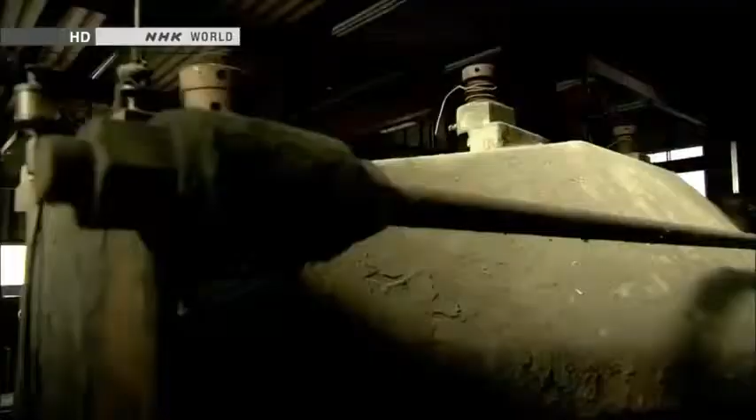In a workshop near Mount Fuji, a curious being has appeared. It's 3.8 meters tall and weighs 4 tons. It is a giant humanoid robot named Kuratas.

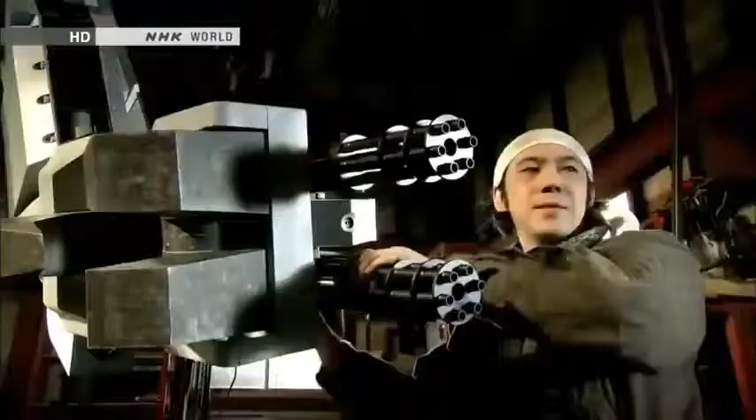Kuratas is a contemporary artist's creation. He holed up here for 2 years, building the robot with input from an expert. He calls Kuratas a work of art, but it's a sophisticated piece of machinery. A person seated inside can control the robot, move its limbs, and grab things.

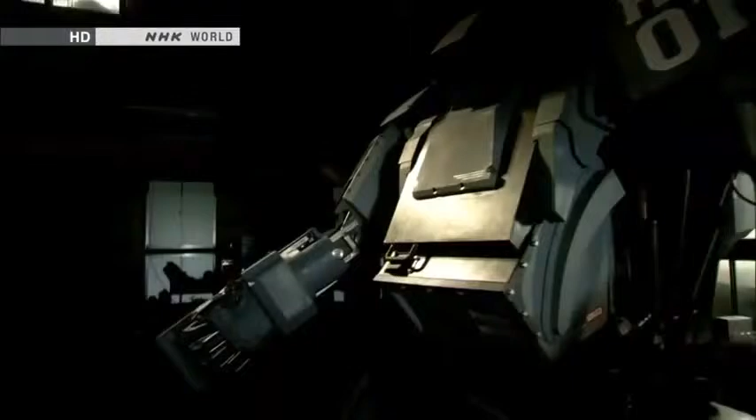The artist says he was inspired by robots in science fiction tales and animation. That vision sustained him as he worked in solitude.

Things that were once unthinkable are becoming real. How will robots evolve? Well, military applications could be one option. They'll probably become more and more like humans. They could surpass us in strength and ability.

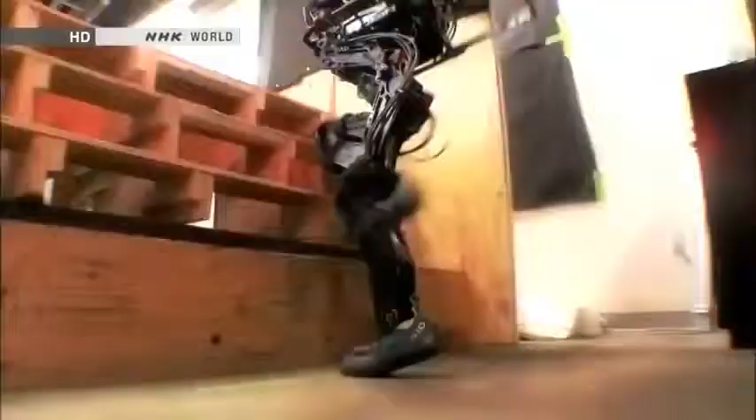People long dreamed of creating these extreme machines. Now, humanoid robots are here. They think like we do, move like we do, and even sacrifice themselves for us.

We want our robot to change society, because robots must be useful. Electronics and computing, progress in vision systems, there's many pieces of it. We will see much more capability continue to grow.

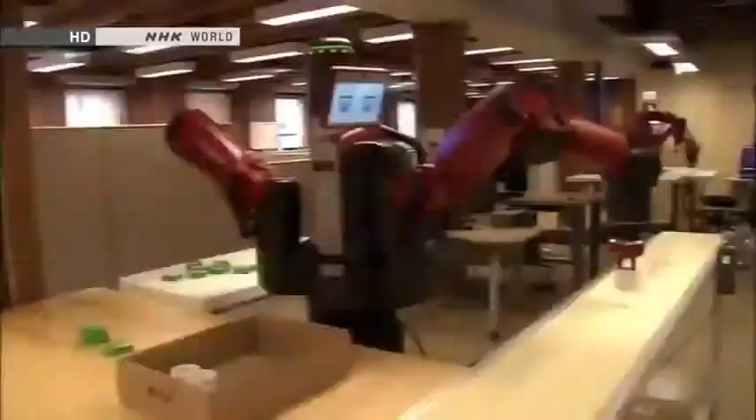Since the Industrial Revolution, people have entrusted some jobs to machines. But there may come a day when humanoid robots do much more complex jobs. Then, what will people do?

You'll see more and more robots doing things in society, whether it's manufacturing or service applications or home healthcare applications. The key will be to skillfully divide labor between humans and humanoid robots.

The disaster that hit Japan in March 2011 accelerated efforts to develop robots with human traits. The Fukushima nuclear accident left people powerless.

Robots can take over when things become dangerous. They can plow through rubble, climb ladders, even make repairs. People are turning to humanoid robots to handle all of these tasks.

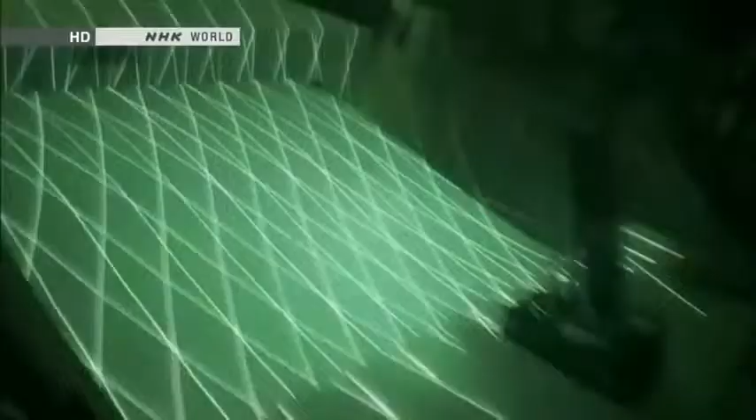We're eager to launch it soon to end the crisis. By joining forces, we can make a truly useful contribution. Only a humanoid could do it.

The day will come when robots will really assist mankind. The nuclear disaster in Japan sparked explosive advances in humanoids at the front line of robotics development. This program explores the future that's fast approaching.

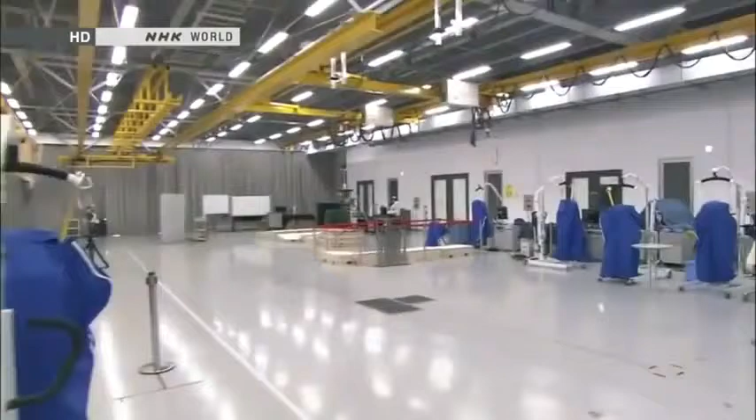Japan is a worldwide leader in the development of humanoid robots. ASIMO is the country's crowning achievement. Engineers continue to make improvements.

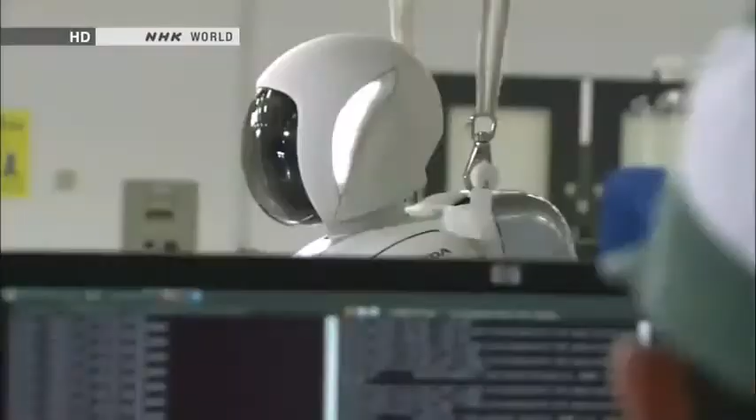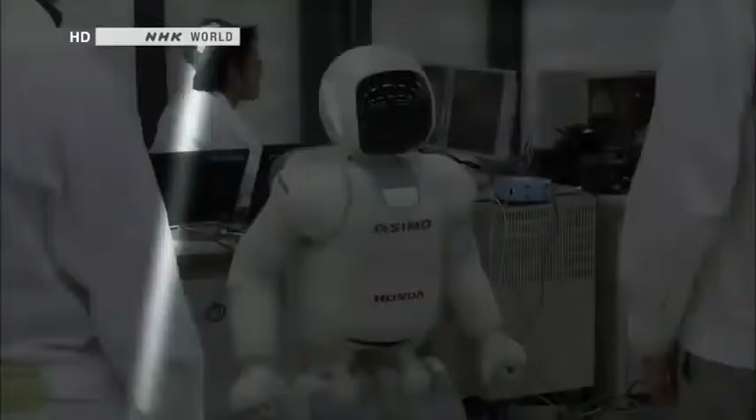ASIMO's most innovative feature is its advanced intelligence. The robot can think and act on its own without human intervention. That's made possible by sensors that replicate our 5 senses.

ASIMO's head contains 8 microphones. It uses them to listen and engage in conversation.

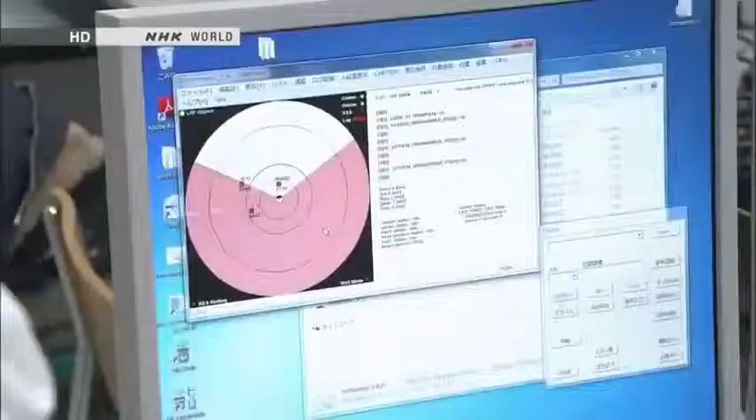ASIMO's artificial intelligence analyzes a vast array of information. That's how it understands people's requests and takes appropriate actions.

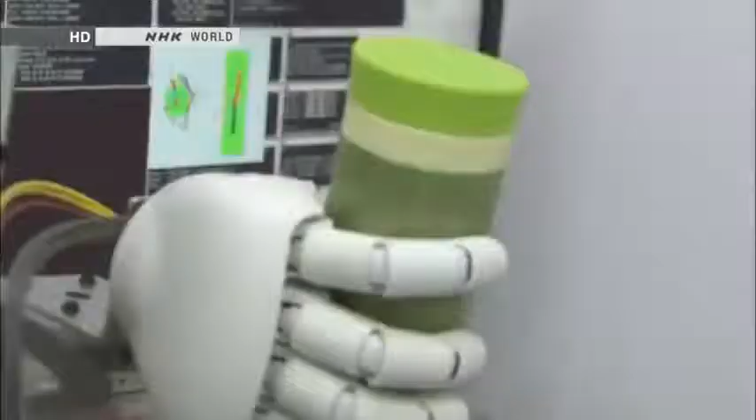ASIMO also has a sophisticated sense of touch. Its fingers can make subtle movements, like a person's. Sensors are embedded in the fingertips, too. They can gauge the hardness of an object, like human fingers do.

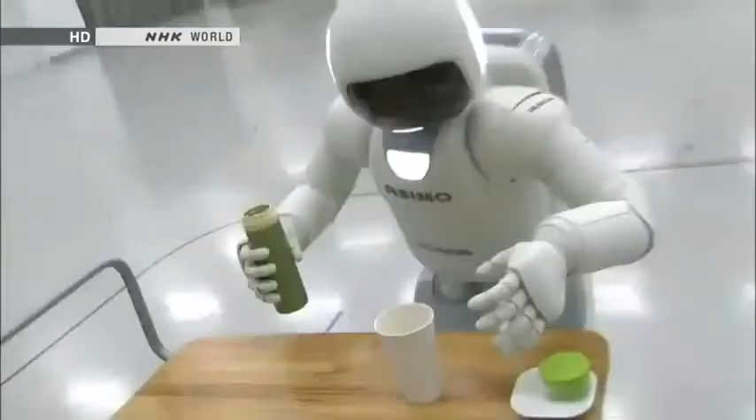Most robots use a fixed amount of strength to grab things. But ASIMO exerts more power to open a tightly sealed water bottle and less when holding a paper cup. Its artificial intelligence uses information from the fingertip sensors to adjust the grip.

The developer's ultimate goal is for ASIMO to be a valuable partner that coexists with humans. The engineers who created ASIMO all grew up watching animated shows about robots, such as Astro Boy, Doraemon, and Gundam. They dreamed of someday making their own.

Satoshi Shigemi is the development team's leader. He has been designing robots for the past 16 years.

From the beginning, we wanted to design a robot that could help people. To realize that dream, we're constantly asking ourselves, what kind of robot would be able to change society, make people happy, and make life easier for people around the world?

Our idea is to create a robot that will change how people live. We're working through the technological issues, one by one, in order to reach that goal.

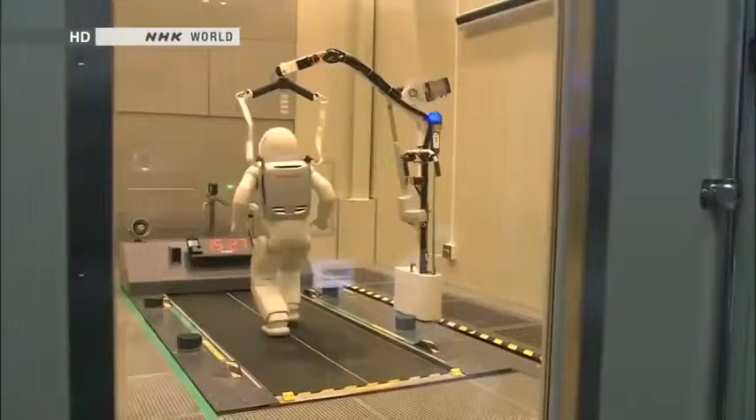ASIMO's advanced physical capabilities are revolutionary. The robot can walk and run. It can reach speeds of up to 9 kilometers an hour.

For robots, walking is much easier than running. When running, both feet momentarily leave the ground. Balancing in mid-air is no easy task.

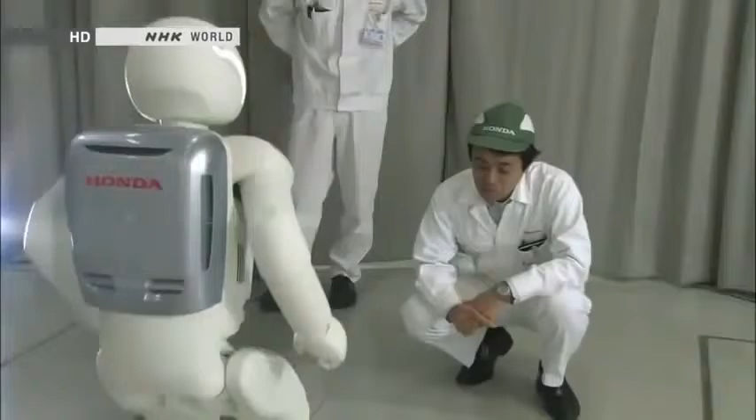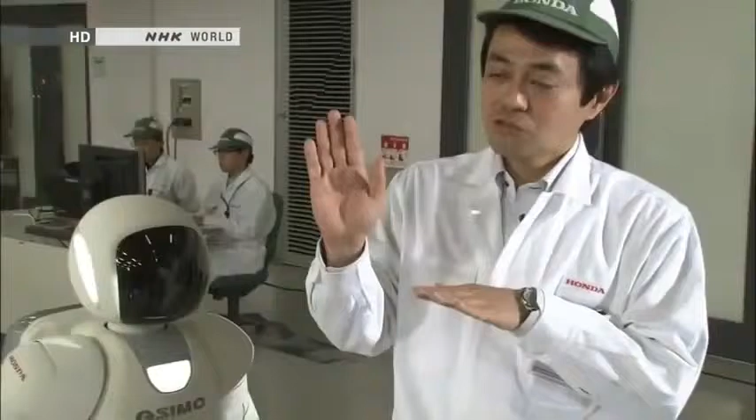Maintaining posture while jumping or floating in the air was a major technological breakthrough. ASIMO leans its upper body slightly forward to maintain overall balance. It goes forward straight in the air.

Sensors in ASIMO's waist measure the robot's angle. It leans slightly to compensate, forward or back, side to side. That's how it stays perfectly balanced in the air.

ASIMO has been evolving ever since development began in 1986, much like a growing child.

But something happened that made researchers realize ASIMO's real-world limitations. It was the accident at Tokyo Electric Power Company's Fukushima Daiichi nuclear plant. The damaged reactors released radioactive substances, making it difficult for humans to deal with the crisis. People needed something that could confront the dangers and bring the plant under control.

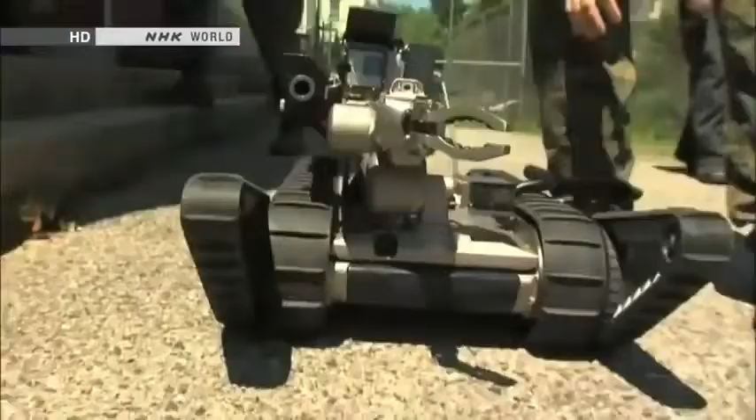Robots. Japanese officials sent a request for robots developed by the U.S. military. The robots were sent to Fukushima in April 2011. They recorded images inside the damaged reactors.

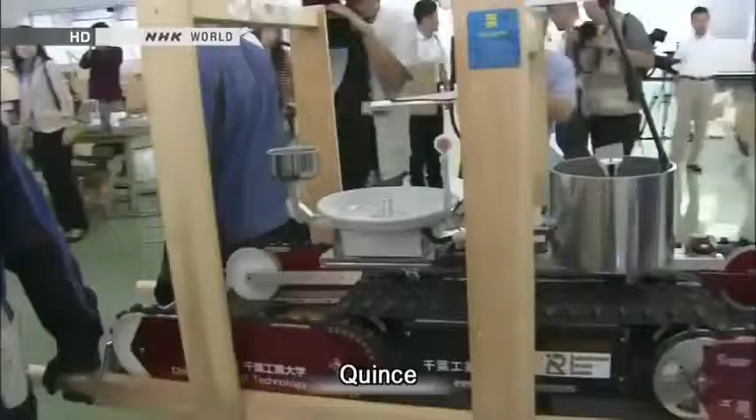Since then, a variety of Japanese robots have been enlisted as well. Robots have proven to be useful, but 2 years after the accident, they're only used for inspections. They're not able to do all the work of humans.

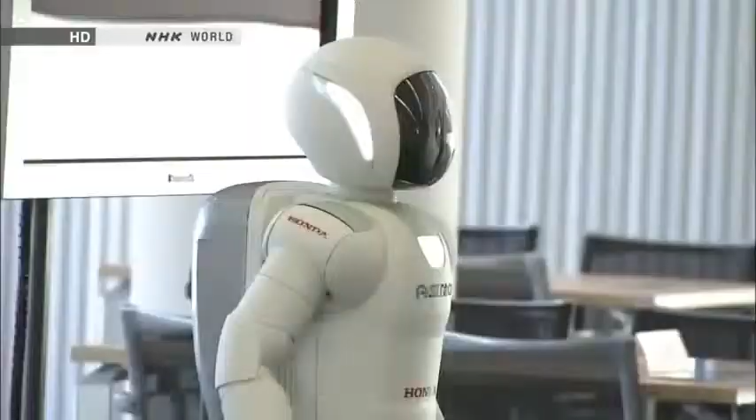What about ASIMO? Right after the disaster, people flooded Honda with phone calls and emails asking the company to send ASIMO to the Fukushima plant. But ASIMO wasn't up to the task. It could move nimbly over an office floor and other flat surfaces, but large vertical gaps and obstacles were a different story.

We heard from many customers. We ourselves regretted that ASIMO couldn't be of help. It was obvious that the ASIMO we had built wasn't ready for real-life action. We realized right away that we needed to make something different, something new that could offer immediate assistance.

Honda wasted no time. Company officials offered to create a robot free of charge to assist TEPCO in the recovery. TEPCO accepted. Officials asked for a robot that could open or close valves inside the nuclear plant.

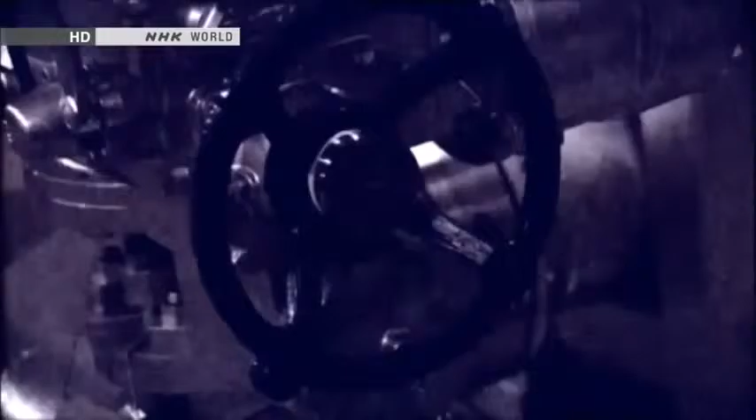We wanted to flush out radioactive materials that remained inside the pipes and bring down radiation levels in the facility. That was our first goal. Unless we opened or closed the valves, the area would remain highly radioactive, and that would prevent workers from entering the facility and impact the entire decommissioning schedule.

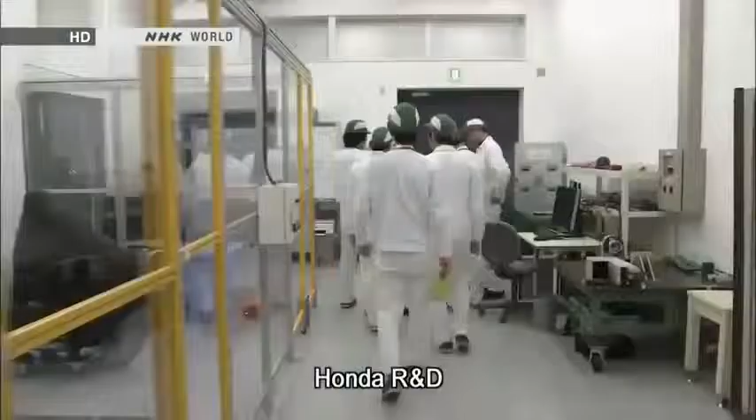How many valves are there? Each unit has from several thousand to tens of thousands of them. In July 2011, 4 months after the accident, Honda began designing a robot for use at the nuclear plant.

Members of the ASIMO team were put in charge of the project. A humanoid robot would take too long to build, so engineers focused on making a robot specifically for operating valves. ASIMO was crucial to their efforts. Its ankles employ advanced balancing technology. Developers reasoned that using it would allow the new robot to work inside rubble-filled reactor buildings.

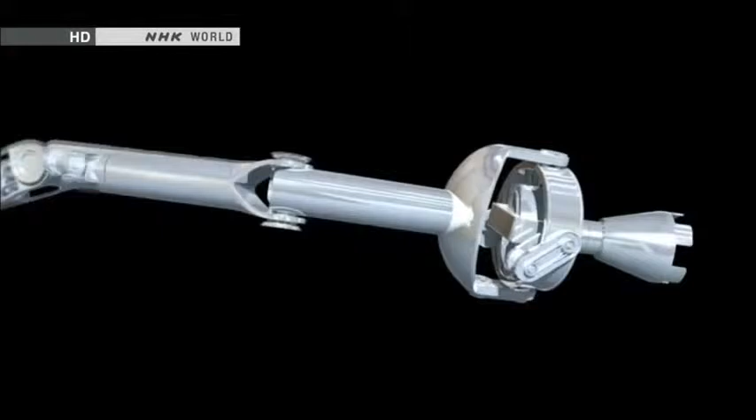The team worked exceptionally fast, completing a prototype in just 4 months. They turned ASIMO's leg into an arm for operating the valves. Even when the base moves, the arm remains steady.

So far, so good. Officials from TEPCO evaluated the prototype at the National Institute of Advanced Industrial Science and Technology. The government-backed group for cutting-edge research contributed to the development effort.

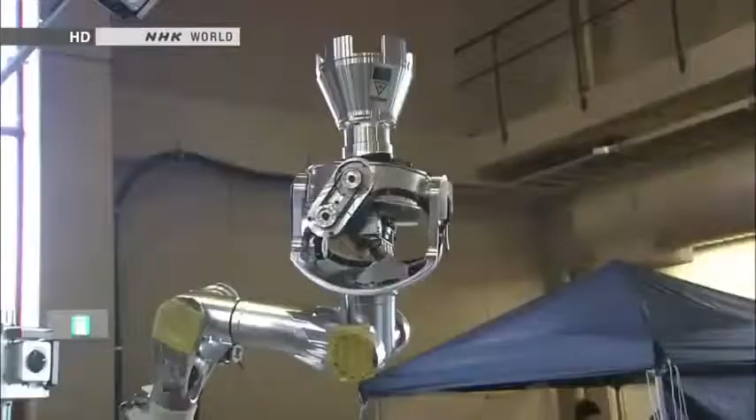A TEPCO official couldn't take his eyes off the robot's movements. We may be quite demanding. That's okay. We might be quite direct. The test is designed to replicate conditions inside the nuclear plant.

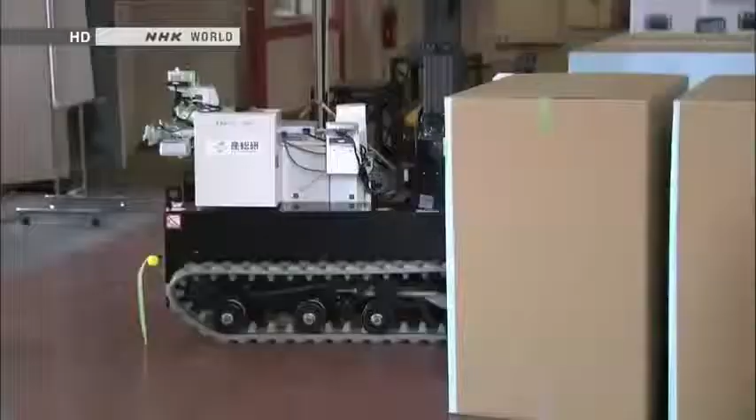The robotic arm is remote controlled. Testers send the arm toward one of the valves. There are a number of unknowns, including the condition of the valves. They may have rusted since the accident. A valve might break if the robot applies too much force, or it might not budge at all.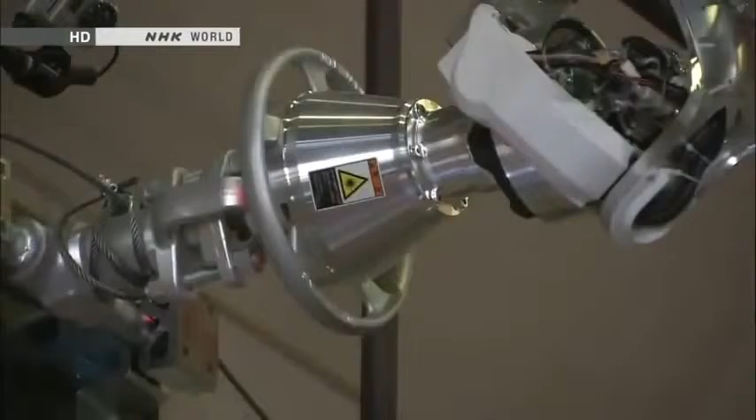The robot uses just the right amount of force and turns the valve on the first try. It's passed the test. This robot can do more than inspections. It could help in the recovery effort.

From what we've seen, the robot seems near perfect. We want to use it as soon as the need arises. It's important that we quickly do what we can to make that possible.

The Fukushima accident also encouraged U.S. developers to design emergency response robots. Department of Defense officials have spearheaded the effort. Before, they had shown little interest in humanoid robots. Now, they view them as vital for disaster response. The architect of the new strategy is Gill Pratt of DARPA. He oversees funding for leading-edge research at the Department of Defense.

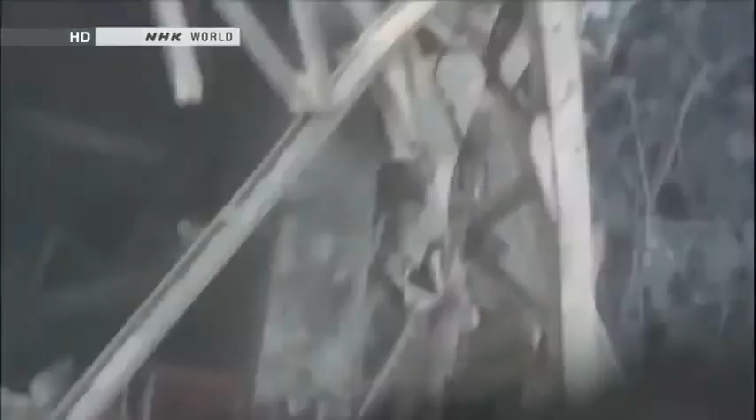There are many aspects of disaster response in Fukushima that inspire people in robotics to work on new capabilities. If they were able to take action during those first 24 hours, the first reactor might not have blown up in an environment too dangerous for a person to do. What's important to us is that the robot is compatible with human environments, human tools, and human operators without special training. As a result, the easiest form that comes to mind is the human form.

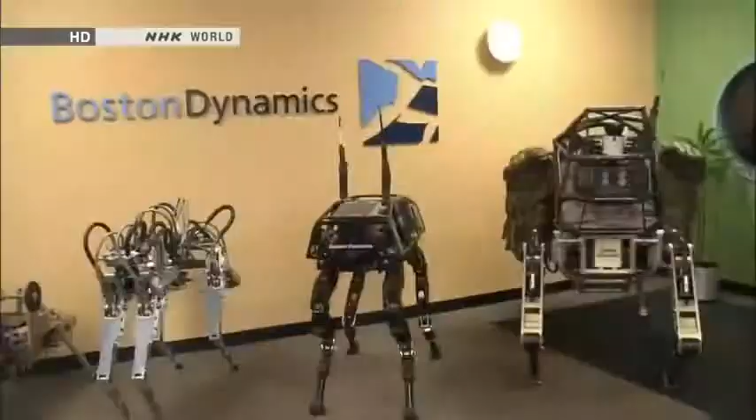DARPA is backing the development of a humanoid robot for catastrophes, such as nuclear power plant accidents. This company is leading the development work and has already built several military robots. Okay, I'll show you the current status of the robot.

This is the first American-made humanoid robot for disaster response. It's called Atlas. Before, U.S. designers had focused on robots with specialized functions.

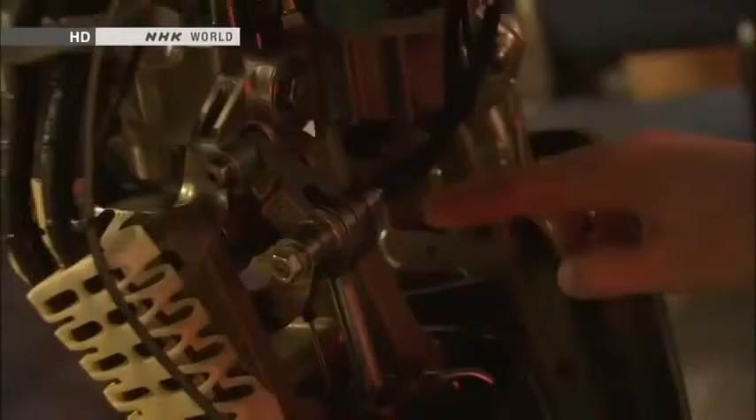Why the sudden interest in humanoid robots? Traveling over debris, prying open valves, using tools for repairs - performing multiple tasks like these is impossible for specialized robots. Crises also require robots that can navigate doors and stairs. Humanoid robots are ideally suited for such situations.

Tests of this prototype were going smoothly. It can easily climb stairs and jump from a height of nearly a meter. It can negotiate obstacles using its arms and legs. It can already handle more demanding environments than Asimo can.

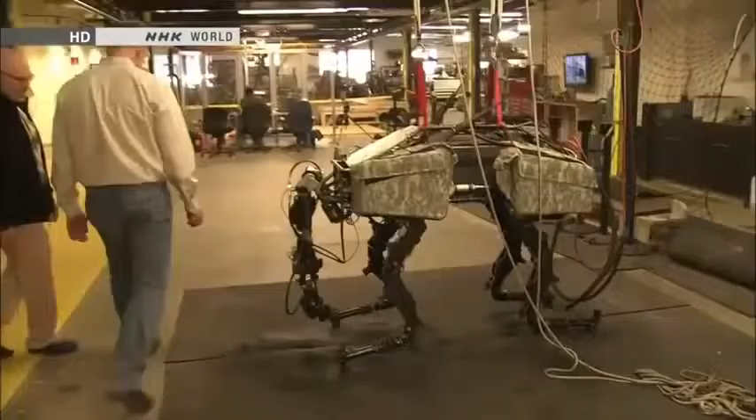Atlas is loaded with technologies originally designed for military robots. A quadruped robot called Cheetah can race through a battlefield at 50 kilometers an hour. LS-3 is for transport - it can carry heavy supplies for soldiers.

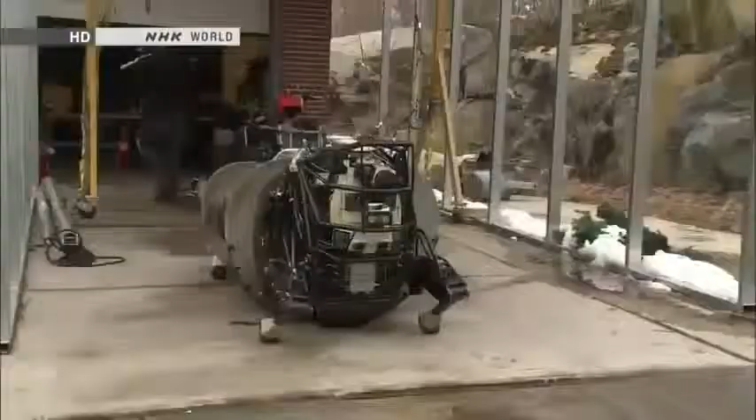The ferocious-looking robot gets its strength from a powerful hydraulic drive system. A hydraulic device can be small, yet quite strong. The black cables convey hydraulic power to the legs.

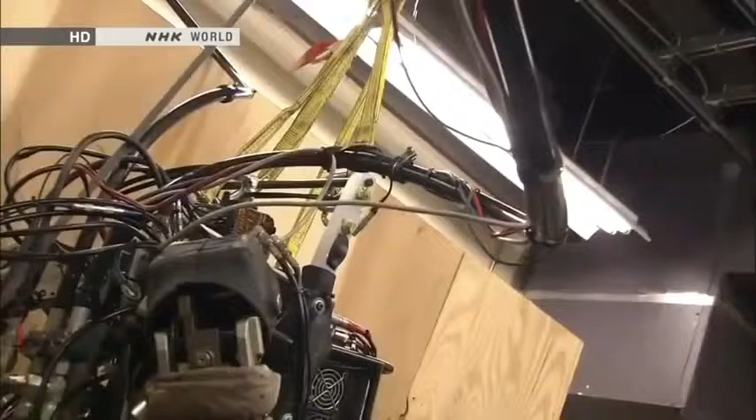That generates the brute force required for harsh conditions on the battlefield. A web of hydraulic cables covers Atlas's body, forming a muscular suit of armor for clearing debris.

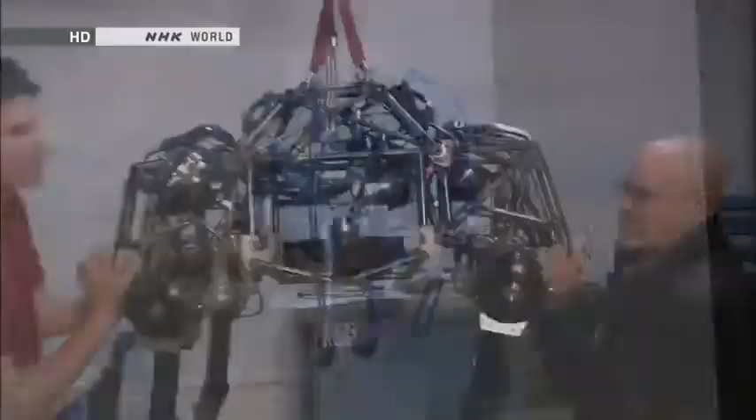Another important technology comes from military robot engineering. This machine's joints have a wide range of motion, allowing for flexibility that humans can't achieve. Atlas's joints are capable of moving in 28 different ways. Atlas can crawl through narrow spaces and withstand sudden shocks.

But then we have the knee - this has 3 in the hip, just like us. This way, and then this way. I am very impressed with the number of degrees of freedom.

It will be able to do these human-compatible tasks without a lot of the limitations that other robots have. Engineers will combine Atlas's rugged body with sophisticated artificial intelligence that's almost near completion. They aim to complete the robot by December of next year.

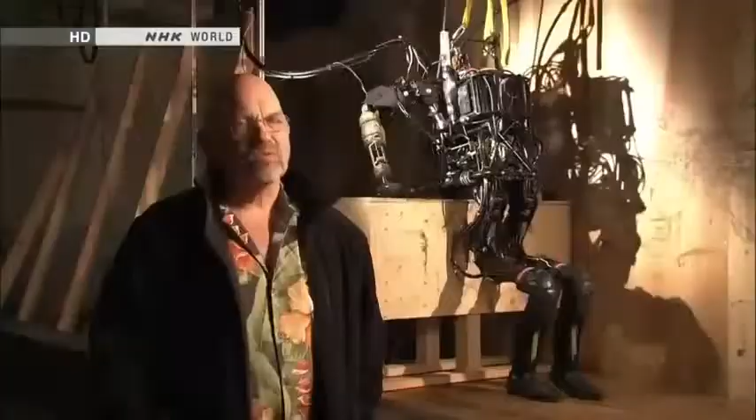One reason you see humanoid robots is because there's some people working who are really interested in robots as an entertainment thing or as a performance thing. I think that's different - we're much more interested in basic capabilities for emergency response, rescue. So I don't think Asimo has been designed to do those things yet.

U.S. engineers stepped up their efforts to develop humanoid robots after the nuclear accident in Japan. Japanese researchers are embracing the same mission. In November 2012, robot engineers from around the world gathered in Osaka for an international conference on humanoids.

Gill Pratt from DARPA was one of the participants. He came to invite engineers to join a project sponsored by the U.S. Defense Department. Okay, March 11th.

After 24 hours, if only a robot had been there to go and open that valve, the entire disaster could have been averted. But we didn't have one, and furthermore, we didn't have anyone that could do the job. So shortly afterwards, we actually started planning the DARPA Robotics Challenge.

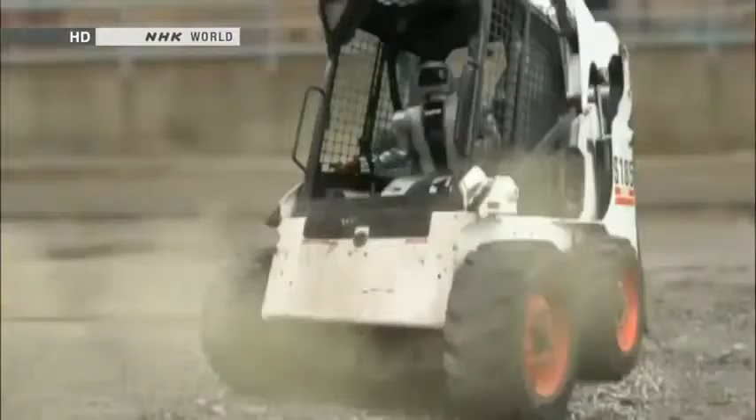The challenge consists of 8 tasks: driving a vehicle to approach a disaster site, walking over rubble, removing obstacles, opening doors, using tools to break down walls, climbing ladders, turning valves, and making repairs.

A single robot must complete all 8 tasks. The development period is 2 years. DARPA will provide contestants with funding of up to $4 million.

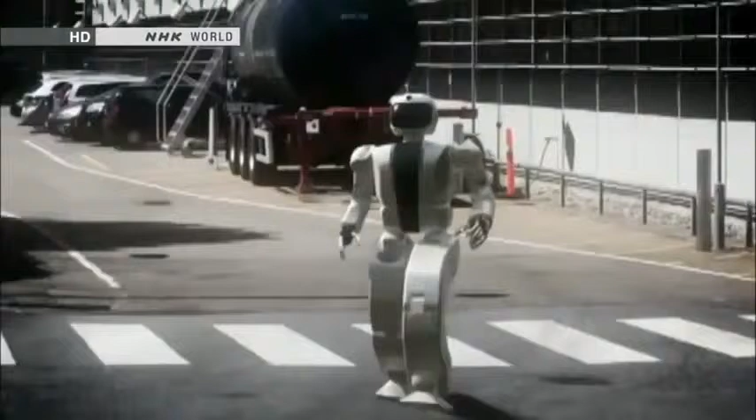DARPA has received over 100 proposals from research groups worldwide, including renowned organizations like NASA and MIT. Japan is at the forefront of humanoid robotics engineering, yet its researchers hesitated to throw their hats into the ring.

So actually, to me, it's difficult not to see that some of the results of DRC are going to be used to advance, as you say, advanced military technology. The DRC is about developing robots that I believe wholeheartedly are completely impractical for military purposes, for offensive military purposes.

Will the technology that we come up with find its way into military systems? Probably yes. But I guarantee you that if you work on a robot for healthcare, there's a chance that that technology will also find its way into military systems.

The members of one Japanese research institution wanted to take part in the competition.

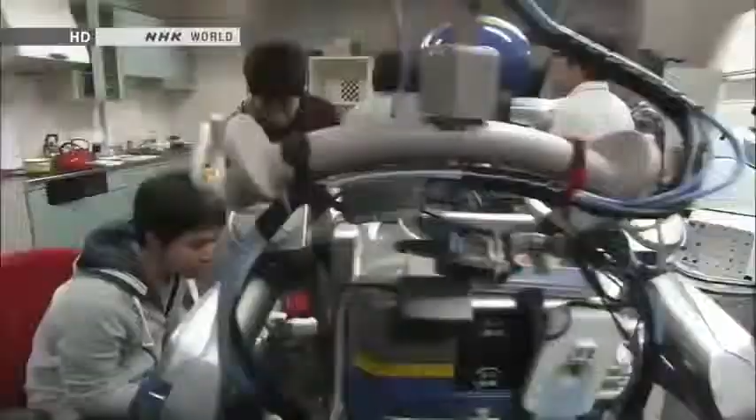They worked at the University of Tokyo's robotics lab. Researchers there, along with those at Honda, are global leaders in robotics engineering. But they faced a major obstacle to competing: the university bans military-funded research.

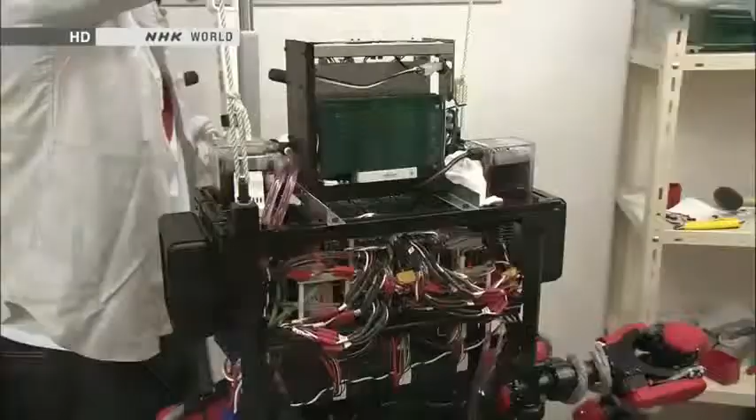Three researchers made a decision. They told the university they were leaving. Then they decided to set up a venture company and enter the DARPA Robotics Challenge. They couldn't shake the feeling that they should leave their quiet university lab and help resolve the nuclear crisis.

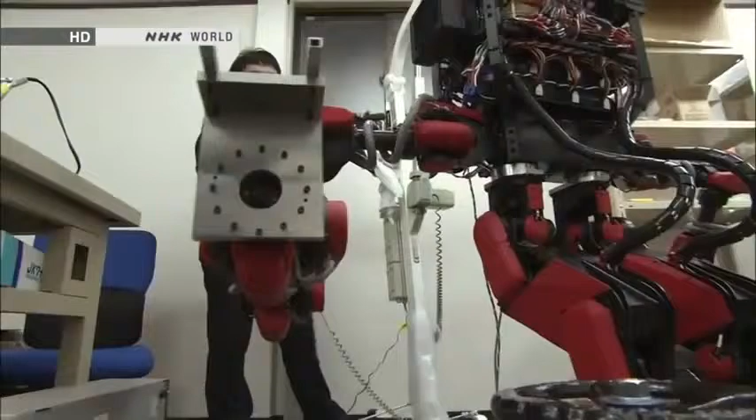Six months after launching their venture, the team had just completed a prototype with help from university graduates. Its long arms can exert 10 times more force than those of conventional humanoid robots.

It's too tight to turn with one hand. It can easily turn a valve that's too tight for a person to turn. The strong force comes from a large electric current that pushes the motors to their maximum limits.

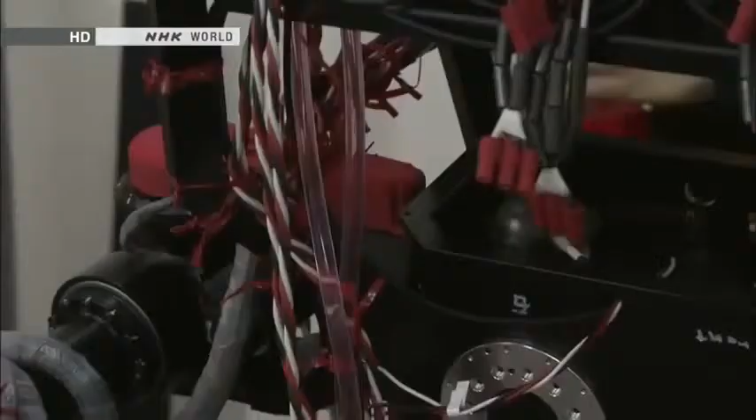A reddish fluid circulates through the robot's body. The fluid serves as a coolant that keeps the motors from overheating. The cooling system should enable the robot to perform hours of grueling work at disaster sites.

The time has now come for the developers to apply their years of research to the real world. A nuclear crisis has happened here in Japan. Radiation is escaping. Researchers in every field must wonder at least once if the technology they've been working on could help resolve the crisis. By joining forces, we can make a truly useful contribution. It's with this in mind that we decided to enter the competition.

One country is quickly catching up with Japan in humanoid robotics: South Korea. KAIST is a government-funded lab for the advancement of science and technology. Researchers there were among the first to express interest in DARPA's Robotics Challenge.

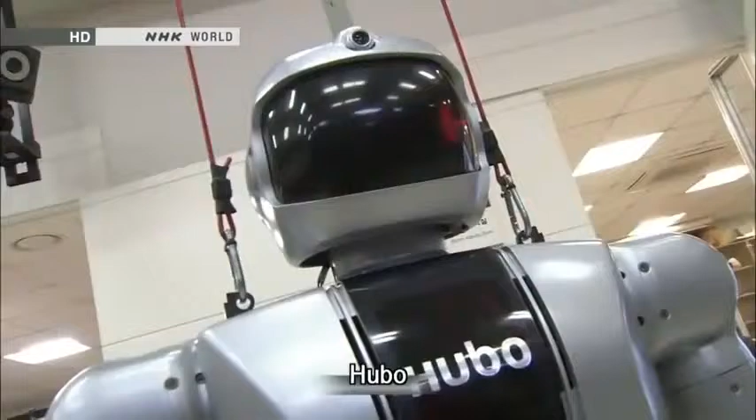This humanoid robot is called Hubo. It's modeled on Asimo, which Honda spent 14 years developing. Hubo was built in just 5 years. Hubo deftly manipulates its hands, and it's also good at dancing. Its moves look just like Asimo's.

Hubo has been undergoing a major upgrade ahead of the competition. It can now bend backward at the waist while walking to handle all kinds of environments. It can quickly pick up tools. The tests were going well.

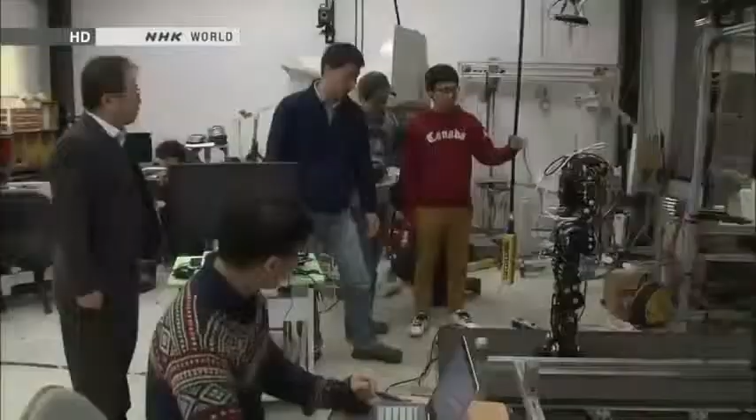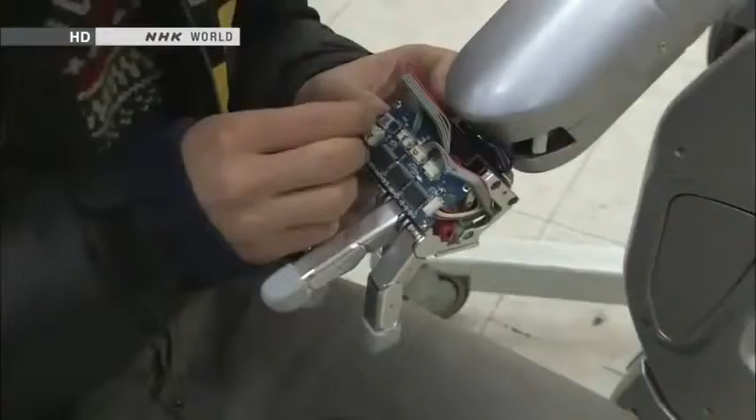People have always compared Hubo to Asimo. Engineers now had a strategy to get ahead of the Japanese developers. They decided to publish certain details about Hubo's design and pursue joint development with researchers at other institutions. One could say that this space inside Hubo's chest captures the heart of their thinking.

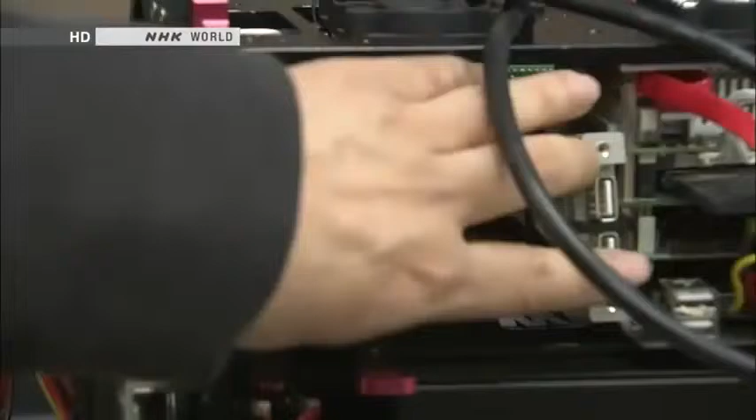It's empty now, but this is where artificial intelligence will be installed. It's removable. Hubo does not yet possess artificial intelligence. Its motions are as sophisticated as Asimo's, but Hubo's movements are all pre-programmed.

U.S. universities that lead research into artificial intelligence will develop a brain for Hubo. The stage has been set for a joint U.S.-South Korean team to compete in the DARPA Robotics Challenge.

Sharing is the key to making technological advancements. That's true in South Korea and in other places too. Research shouldn't be confined to one place. People developing humanoid robots elsewhere are too close-minded.

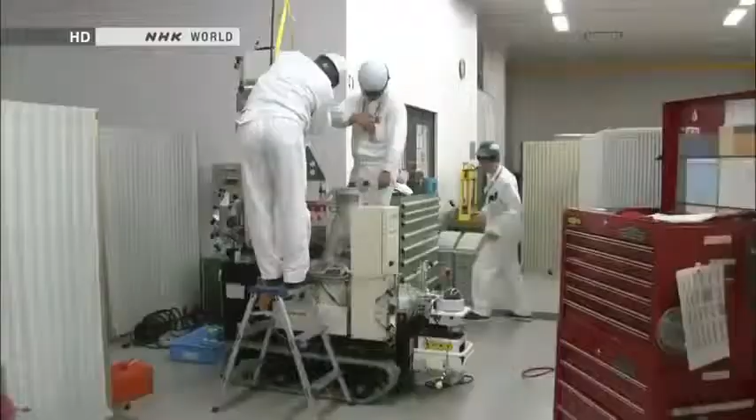Researchers at Honda were also invited to enter DARPA's competition, but they declined. Their energies were focused on designing a robot to tackle Japan's nuclear crisis.

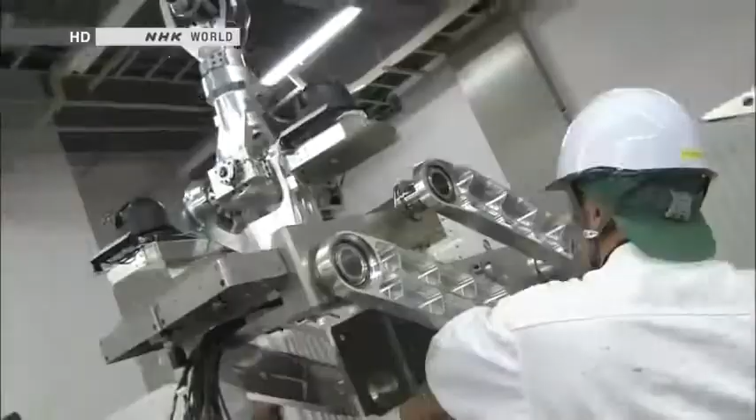Nearly a year has passed since Honda's robotic arm passed evaluation tests, but the device has yet to be deployed to the nuclear disaster site. That's because officials at TEPCO requested a change in specifications. Engineers have replaced the valve-turning hand at the end of the arm with a camera.

TEPCO had changed its plan. Officials decided to put priority on assessing conditions inside the plant's facilities. They said it was too early to have robots work on valves. There wasn't even a recovery plan in place when we were working out the valve manipulation tasks.

Confusion also prevailed at the site. We were expecting valve work to begin 2 to 3 years after the disaster, but the timing has ended up being later than what we'd assumed one month into the crisis.

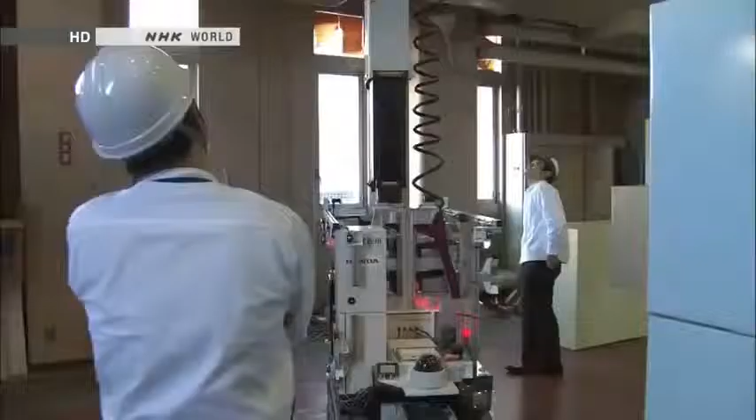The robotic arm will soon be sent to the accident site. It will provide the first images filmed from high up. The robotic arm was not the end of Honda's efforts. Its engineers had another secret mission.

They would develop a new humanoid robot, an updated version of Asimo for use in disasters. The site where the Fukushima disaster took place is dark and off-limits to humans. Only a humanoid robot with both intelligence and motor skills could climb over the debris, get to the accident site, and perform the work of people. In other words, a robot like Asimo.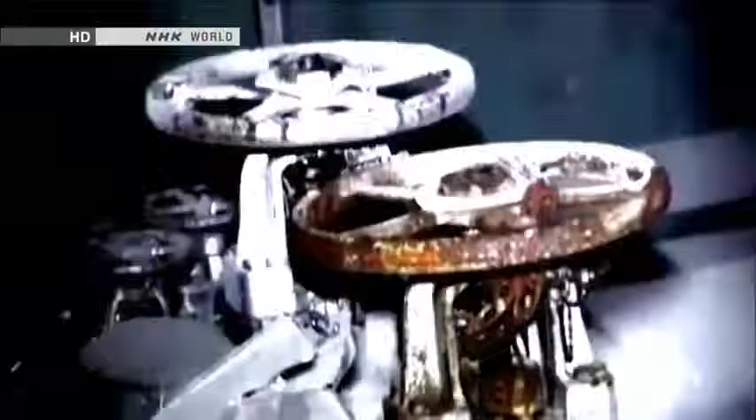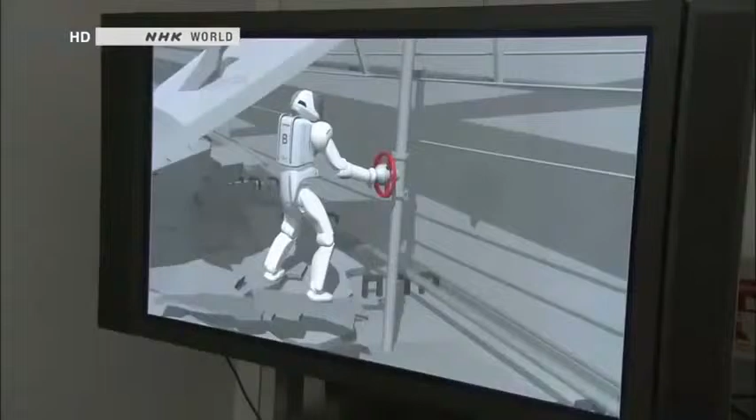Let's use our skills to make a humanoid robot that can tackle disasters. Asimo's engineers were united by this idea. The robot they envisioned would not only walk, but also use its arms to crawl. It would use every means possible to reach its destination. A dramatic update would be necessary.

A disaster reduction robot would be useless if it couldn't get to the site. It's important to get to the scene no matter what. Disasters create all kinds of debris that crumbles easily or breaks when stepped on. It's because it's dangerous that robots replace humans. That's what makes them valuable. A robot that couldn't get to the scene would be totally useless.

Honda's engineers began developing robots in 1986 with the goal of making people happy. 27 years of research is now being put to the test. As we saw in the Fukushima Daiichi crisis, the bottom line is that robots can stand in for humans in places that we can't go to or that are too dangerous. I am committed to delivering what's needed, when needed, in the shortest amount of time.

The accident in Fukushima spurred the development of humanoid robots around the world. The disaster also prompted people to question the roles of humans.

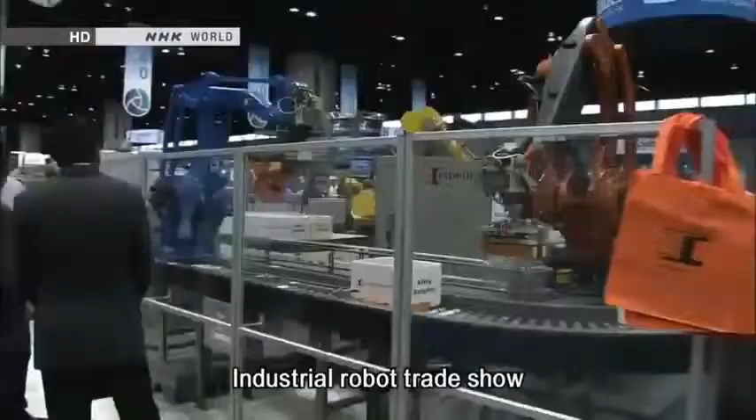One of the largest trade fairs featuring industrial robots took place in January. Global manufacturers displayed their latest models. Companies are developing more and more two-armed humanoids for industrial use. One new product at the event caught a lot of people's attention.

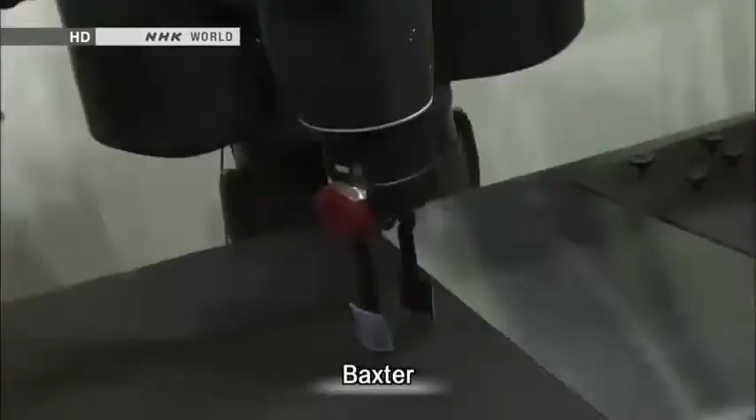Baxter was created by the inventor of a best-selling cleaning robot. It's equipped with sophisticated artificial intelligence. Baxter is designed to work side by side with people in factories and other settings.

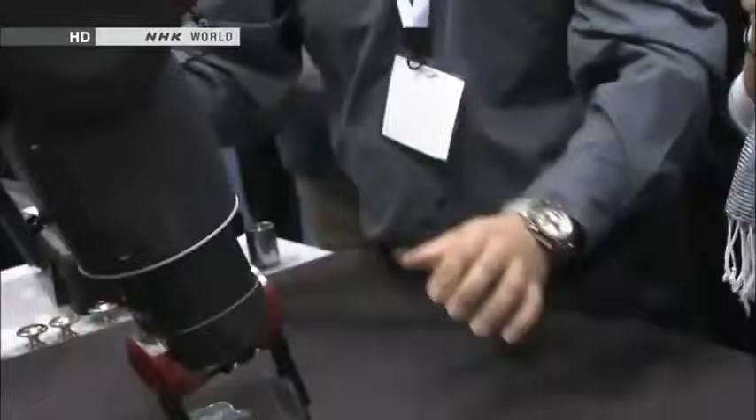The robot's most unusual feature is its ability to master a task in a matter of 5 minutes. All that's required is step-by-step manual instruction. No complicated programming is needed.

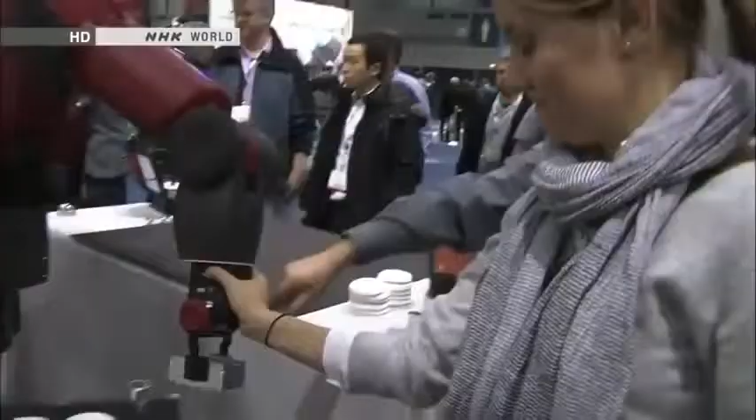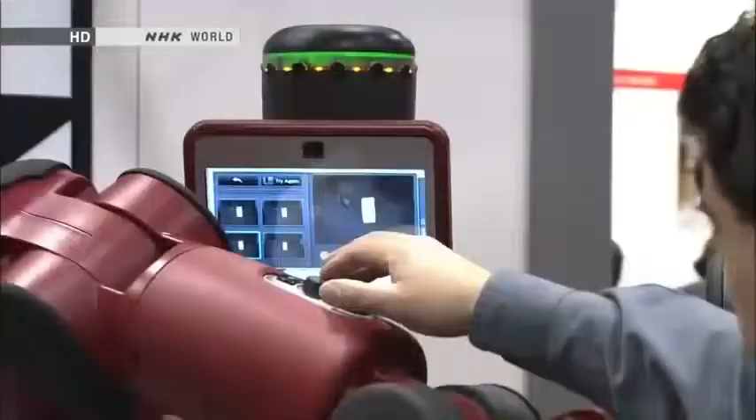The expression on the face on the LCD screen shows whether or not the robot has understood the task.

Baxter costs $22,000, a bargain for a humanoid robot. The maker says buyers can recoup their investment in several months and slash labor costs.

I'm very impressed with it. I work for a small manufacturing company, and we have some older employees who are looking to retire, and there's some tasks that Baxter could do for us very effectively. Plus, it would be cheaper than employing a person. It's not going to get tired. It's not going to need to stop. It'll keep running while everybody else is taking their lunch.

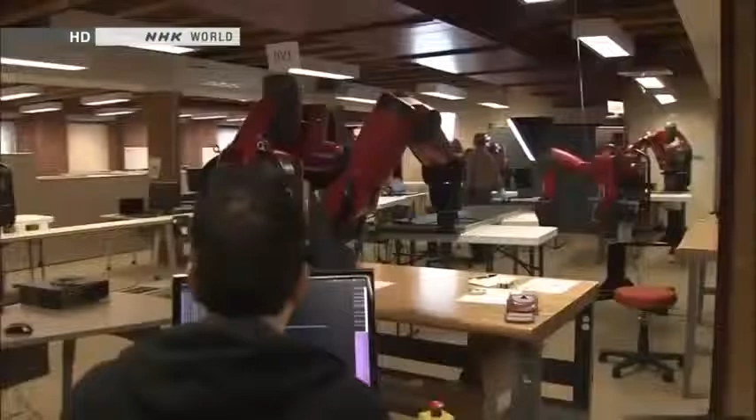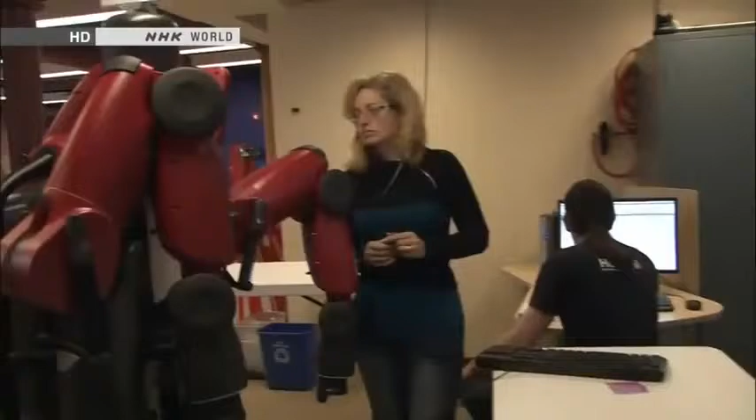The Boston-based manufacturer has a flood of back orders. Officials say someday Baxter will work at places like coffee shops, taking orders and grilling burgers. Eventually, they expect to have 500,000 U.S. customers.

Today we're focused on manufacturing, and there's a very big opportunity in manufacturing, but there's lots of other places a robot like Baxter could go. We had the Industrial Revolution at the turn of the last century. We've just gone through the computer revolution, effectively at the turn of the most recent end of the century. We are now into the robot revolution.

Will people and robots someday compete for jobs?

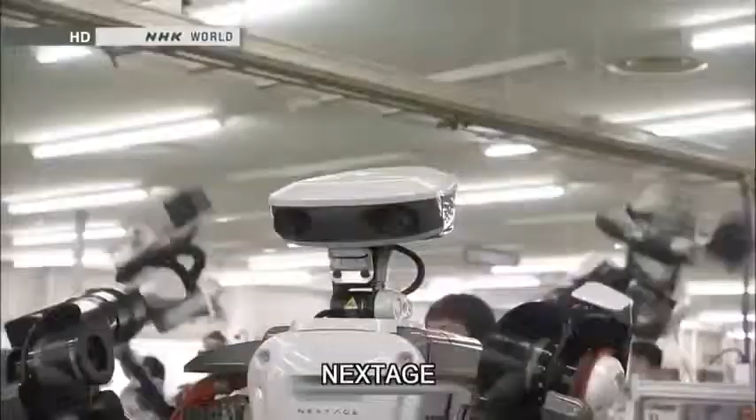At 8:30 one morning, a group of new employees takes part in daily morning exercises. They are 13 humanoid workers called NEXTAGE. This company began using the robots in earnest last year.

They have 2 eyes and are just like humans. They're cute!

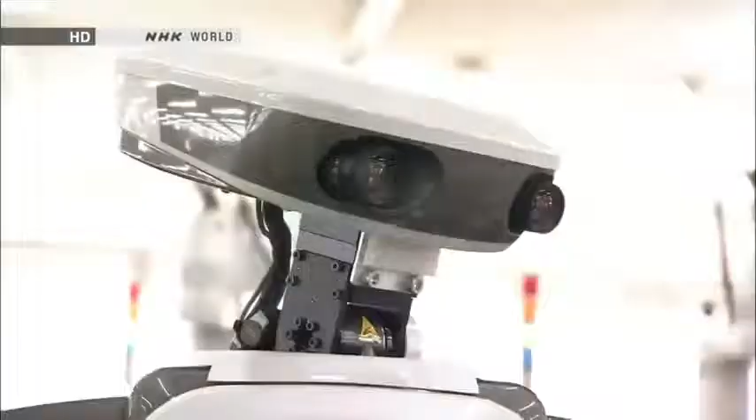This factory manufactures money sorting machines for cash registers. The humanoids work on a production line that was previously manned entirely by humans. The robot visually confirms the parts set in place by a human worker, then it begins its task.